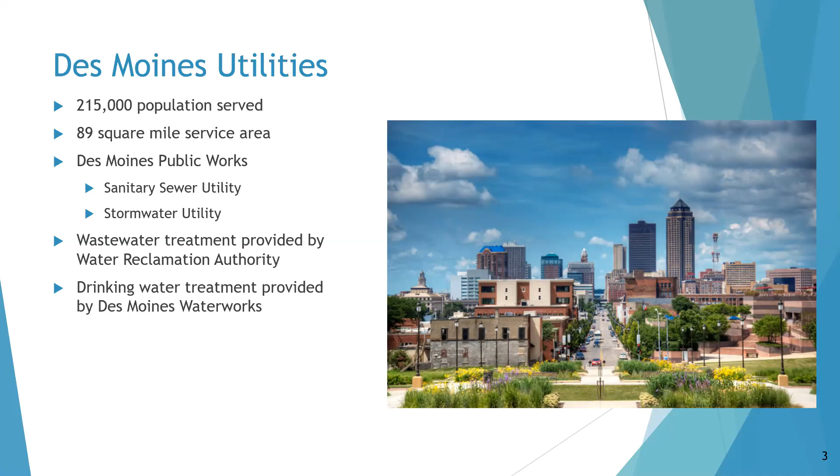A few statistics about the Des Moines stormwater utility. There's about 500 miles of storm sewer within the city. That's the underground piping and boxes and all the different underground networks that exist. 270 miles of open channel conveyance according to the GIS system that we have. I'm sure there's more out there that's just not completely quantified, and we'll want to make sure we're capturing that. Within the system, there's about 29,000 storm sewer structures. So there's a lot of those storm inlets you can see along the curbs, a lot of the junction boxes and other pieces and parts that go into that.

32 pump stations, 35 detention basins, and the city owns and operates 16 miles of levees, but they operate about 23 miles because we actually operate and maintain about 7 miles of Corps levees. And that's one of the big projects we'll talk through in just a little bit too.

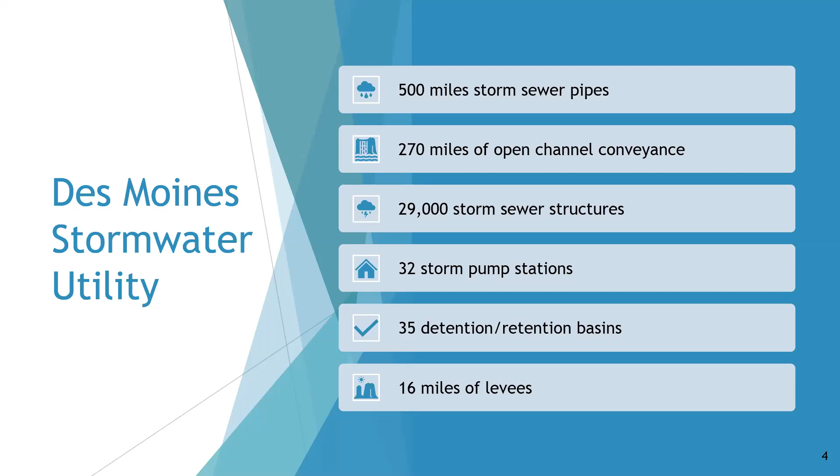So you might ask yourself, why is stormwater master planning really a big issue right now? For me, I've only been at the city about a year now, so I missed the June event, but I grew up in central Iowa, so I know the big events that come through every 5 to 10 years. Sometimes those are big river events, when the Des Moines River and the Raccoon River get filled up and flood. But what's really driving this right now was more of a localized flooding event. If you lived in northern Des Moines or Ankeny towards the north, pretty much everybody was either impacted or knew somebody that was impacted by the June 30th, 2018 event.

The picture in the lower right is actually the tracking of how much water was dumped from that event. And the bad part was it was a very short duration event, but it dumped a lot of water. As engineers, we like to be able to quantify what type of storms they are. Is this a storm that we anticipate will happen every year based off historical averages, or is this going to be every 100 years?

And the June 2018 event turned out to be, in Des Moines anyway, that 7 to 8 inches was about a 500-year storm because of the amount of water and the time that it took for it to hit the ground. As it traveled up, it got worse into Ankeny, so they got about 10 inches of rain up there, and it caused some problems there, but it caused even more problems for Des Moines as it was coming down the east side in Four Mile and flooding on the east side of Des Moines.

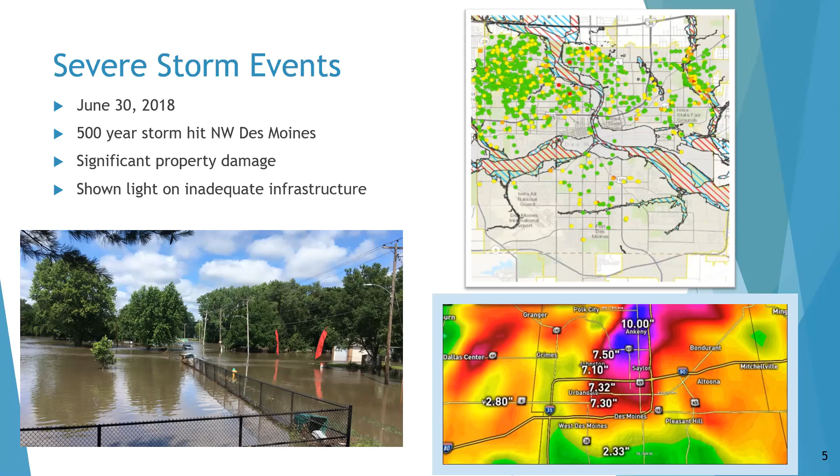Those watersheds have had a lot of dollars identified that need to be spent, but there are other issues throughout the city, and there has not been a concerted effort to try to prioritize where we should spend the dollars. For the most part, whoever's yelling the loudest gets the dollars. And that's a reality with just about everything, unless you have a defensible program in place to say, this is why we're spending where we are now.

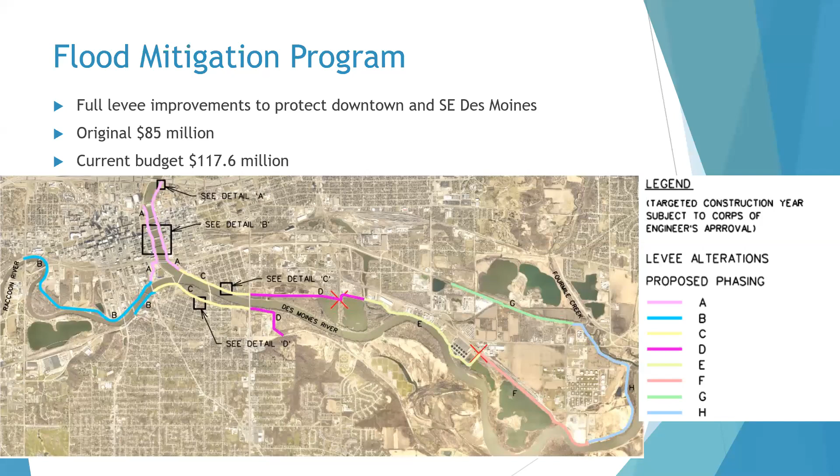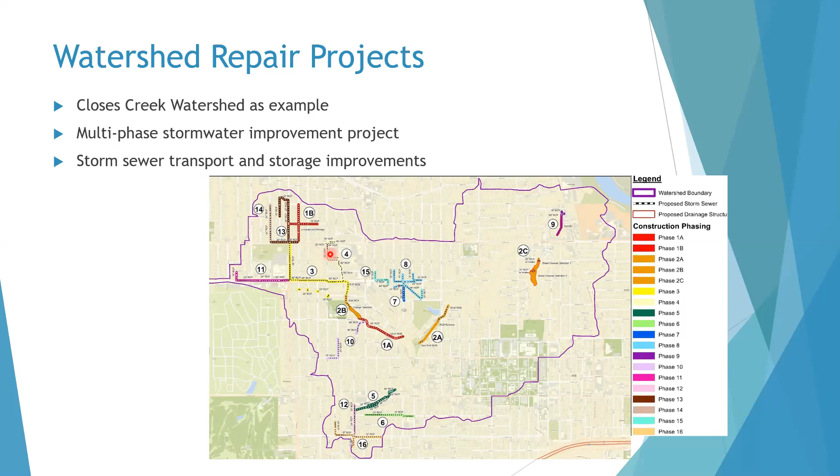So this is an example of those more watershed approaches we're looking at, and these are good, but are all of these really higher priority than other areas within the city that just haven't been yelling and screaming as loud? Maybe, maybe not, but that's why we're going to go through and try to capture as much of that as we can.

So some planning challenges we have, as you saw, there were large programs that are dominating the capital improvement program. The stormwater CIP peaks at about $40 million in 2021, but then it drops down to about $7 million. But most of those dollars are still rolled up in that large program. There's only about $1 million or $2 million a year for system-wide renewal and replacement, and that's just not enough for a system of our size.

So we have an opportunity right now, as we're working through some of those large programs that are using a lot of the capital dollars, to put a good plan in place for the stormwater system. A defensible plan, a risk-based plan, one that the council can get behind, and also a plan that's not being driven by one person. This is a plan and a process that the entire department is behind, so if that person takes another opportunity, it doesn't just die.

So I threw this one in, excuses to avoid master planning. Master planning is just an engineering activity. Well, as an engineer, I like to have a good, well thought out plan based off of data, based off of information that we know. And if we don't know, we make some reasonable assumptions based off of engineering judgment or information from the folks that have been here. There's a lot of good information from folks that have been with the city for 30, 40 years that we can bring into this process so that even if we don't have the perfect data, we're pretty confident what we're seeing is reasonable.

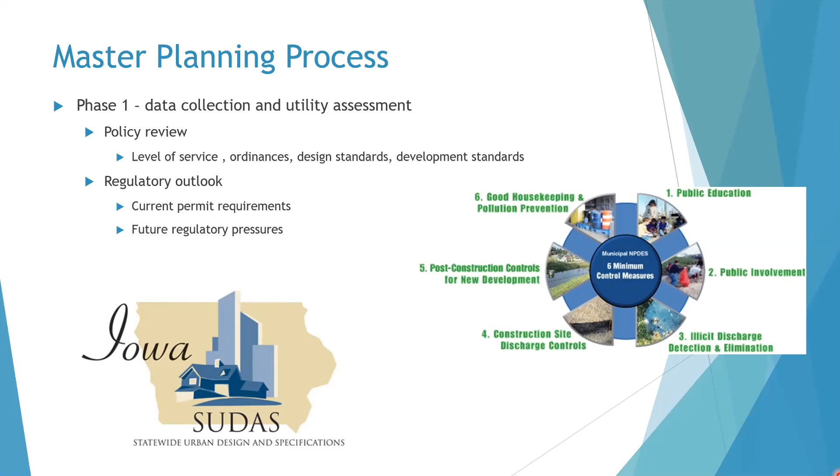But phase 1, we're looking at data collection and utility assessment. So we're looking at where we are right now. What do we have right now? What information do we have right now? What policies, ordinances, and design standards do we have in place? Also looking regulatory-wise, what current permit requirements do we have? We do have a permit that we need to meet. How well are we meeting it? We're going to be going through an audit of that. But then also looking to the future, are there future regulatory pressures that may impact what we're doing now that we'd be well advised to consider when we're putting together a program like this?

Looking at existing data. How are we collecting data on our assets, on our pipes and our structures, and the work that's being done, and the materials that are being used and the contractors that are being used, so that we can understand how much does it cost to actually operate and maintain a system of our size. Most people are still using a lot of paper work orders for that. We actually have a

program called Lucity, a computerized maintenance management system that we use to track our assets, our work, and also tied in with GIS so we can see it on mapping. But understand, what do we have and how confident are we in the data? Just because I have a database that says this is what everything is, well, that data came from somewhere, and it was usually somebody pulling something off of an as-built, so how confident are you? So there have to be some spot checks on that.

Or even at the Home and Garden Show, we were out there helping. The MPO was leading it, and there were a bunch of other folks from cities and the county supporting the rain campaign, and just getting up public awareness on what can and should be done. But we're going to take a look at all those things and see what's working, what's not, and how can we improve that.

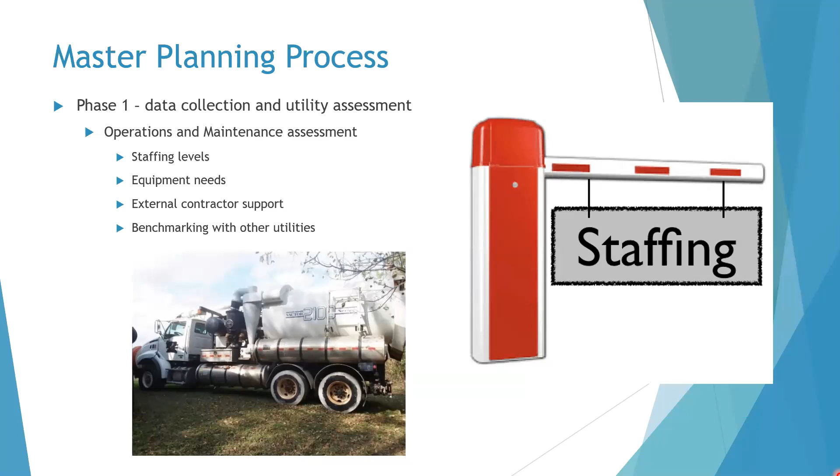They're not letting stuff break down so that everything we're doing is an emergency repair. We're trying to be as proactive as we can. So taking a look at staffing levels, equipment needs, and external contractor support is another piece of what we're going to be looking at as part of this process. So that was kind of identifying what do we have and where are we at right now.

We take that data and start doing some analysis with it, and that's going to be phase 2. So looking at system characterization, making sure if there's gaps in our data, how do we go and collect that on the gravity system? Are we missing something on the pump stations? How do we tie in the green infrastructure that's being installed? We're looking at some of the newer developments, the Market District.

We're starting to have some meetings so that, rather than every building or development having to do their own on-site detention, we move more to a regional detention process. Green infrastructure, bioswales in the green space between the street and the sidewalks, being able to manage some of it there, and looking at that as an overall system. Des Moines has not done that very much. I know some of the other cities in the region have, but Des Moines has been a little reluctant to do too much of that.

And so how do we do that? Going through and doing some high-level hydraulic and hydrologic modeling, problem identification. So this goes back to some of that public outreach, which is the next one we had there.

But some folks have had stormwater issues, but they've just been an issue for so long that they've kind of given up on raising it as an issue anymore. The basement floods; when it rains, there's a foot of water in my basement. Well, we put everything up on a shelf 2 feet in the air, and we don't really seem to have any problems with it. It fills up for a little bit, and then it goes away, and they just kind of live with it. I'm kind of flabbergasted by that, but that's what's happened in some neighborhoods.

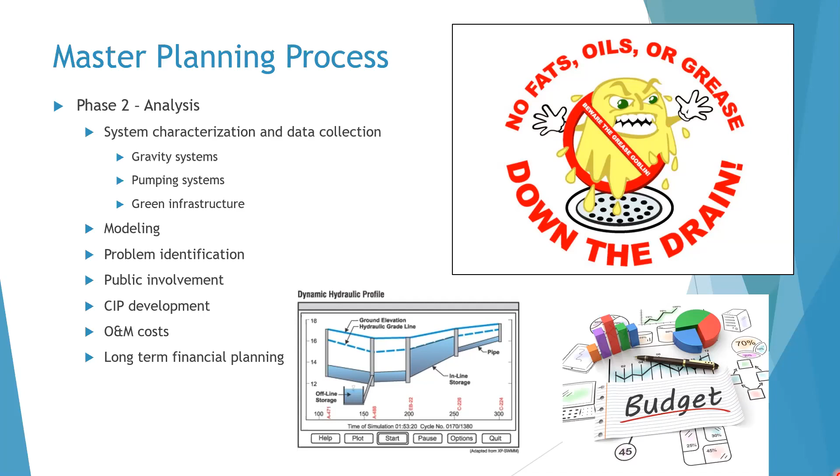And so how do we get out and really try to capture as much of that as we can, so that when we're identifying the problems we have, that they're realistic? And also so that when we're done, people don't come out of the woodworks and say, well, I didn't get to tell you what my problem was. So we need to be able to have some good public outreach there. From there, we go through CIP development, the 5-year, and then looking at O&M costs, making sure we're capturing that and putting together a long-term financial plan.

And then phase 3, this is where you're getting into that design, construction, and operations of everything that you have. Making sure you have capital projects that are solving the problems, making sure they're being done on time and on budget, making sure we're meeting our permit compliance, our stormwater permit and our sanitary NPDES permit, our system maintenance, making sure we're out there and making sure inlets are clear when it's raining, or if they do get clogged up, we're cleaning them out in a quick time manner. And then periodically updating the plan based off new information.

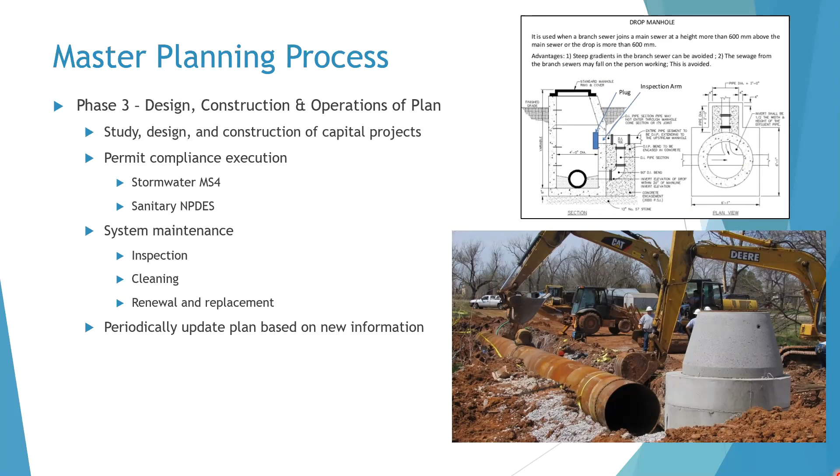If we can go through this effort and we build this perfectly, make this perfect report, if it goes and lives on a shelf somewhere, it's basically worthless in a couple of years. We need to have some way so that this continues to be updated based off of new information that comes in, new things get prioritized. We have a big rainstorm and we have issues in another part of the city. We don't want to throw the old plan out, but we want to be able to adjust it as new information becomes available.

Some benefits of master planning can also link opportunities. Des Moines, like I said, hasn't done a ton of green infrastructure, but we're dipping our toes in a bunch of places, either in neighborhoods or even outside of the neighborhoods. We're working with Polk County and some of the other organizations for bioreactors and oxbows in Fourmile, kind of restoration of some of the smaller oxbows along the streamway. Trying to standardize how do we manage those things? We do a pretty good job of designing them and putting them in, but it's difficult to make sure that they get established and make sure that they're maintained for the long term.

And we're even evaluating opportunities outside the city that can benefit the city for both flooding and water quality. Are cover crops something that are worthwhile for us to put some dollars into if there's a return to the city on those sort of things? And so we're looking at things very small scale to very large scale.

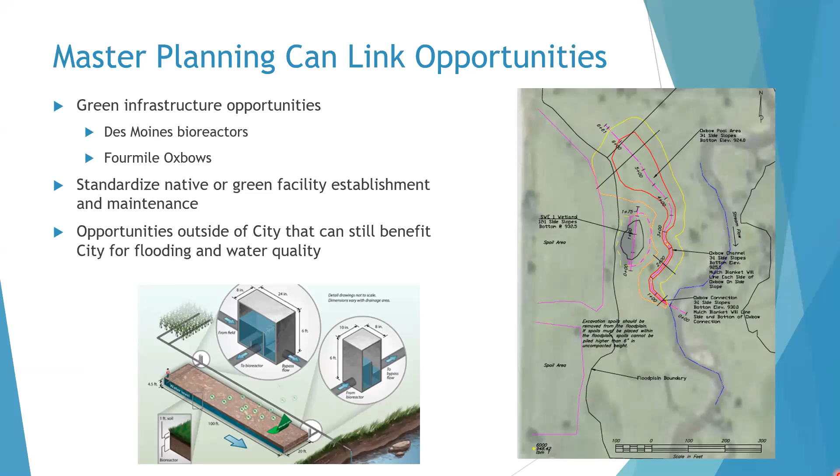So some outcomes and tools that we really want to gain from this, and I talked a little bit about this already, and I know I'm up to 25 minutes, so I apologize, I'm almost done. But we're looking at benchmarking with other utilities, having that as a way to talk through where should we be targeting, having more effective public outreach and education methods and tools. We talked about the modeling a little bit, but having at least a system-wide across the city, the hydrologic, so understanding how rain has fallen, and then the hydraulic piece of once it hits the ground, how does it travel? It travels across the yards, it travels across the streets, it ends up in the pipes and the streams and the rivers, and understanding the different rainfall events and how those actually flow.

Having tools and processes to collect information on the assets, and then also understanding what's the remaining useful life. You know, we put a pipe in 50 years ago. Do we expect that to last another 5 years or another 50 years? And so you generally need information. You can make a lot of assumptions. I can make a lot of assumptions and come in the ballpark, but it's much better to have specific information on each of those assets to be able to make those projections. You know, linking electronic systems to store, manipulate, and output the data.

So right now we have a lot of different systems. IT has systems, engineering has systems, public works has systems, finance has systems, and they don't talk together very well. And so quite often things slip through the cracks when we're trying to make sure it's getting passed from one department to another department, or even one person to another person. Sometimes things get dropped or missed when we're doing those sorts of things.

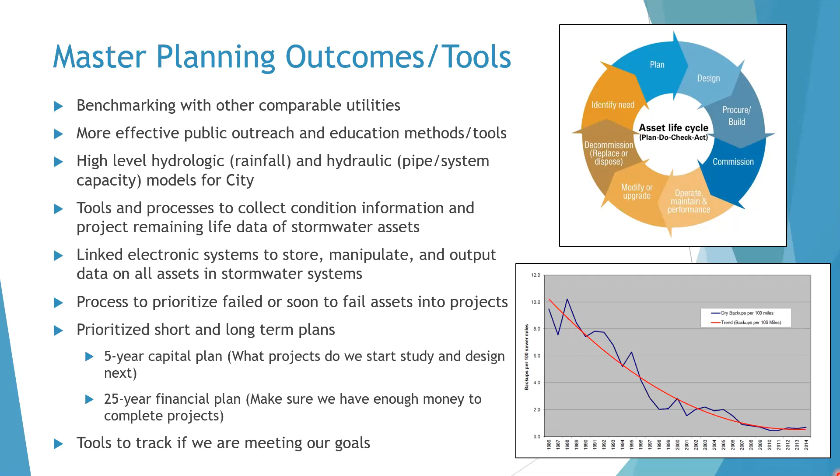So master planning benefits, we talked about this, moving a little bit from reactive to proactive, better understanding risks, manage costs, and be able to justify your needs to your elected officials. I've actually been through this with another utility, and that was one of the biggest benefits of going through something like this. Quite often when you come to an elected official and say, we need more money to do this. Well, why? And what if we don't? What could happen? What's the risk?

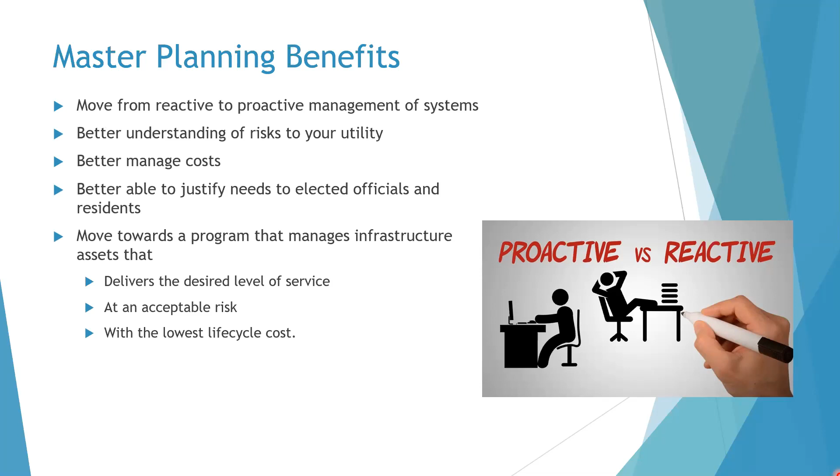So having a risk-based approach to this so that they can understand if we're not doing this, the system's continuing to get worse over the years, and really we're just pushing the problem further down the road. And then finally, moving towards a program that delivers infrastructure assets at a desired level of service at an acceptable risk and the lowest life cycle cost.

And I'll let you read my final thoughts, but I will go ahead and open it up for any questions. Are we doing questions now or at the very end? We're gonna do them now for you. Okay. And I'll help with that.

So it looks like the first handful of questions are more about the green infrastructure. So bioswales, prairie planting, open lands, and then reducing impervious surfaces. So how is this being worked into the planning process? I know we've had Jonathan Gano before with our group saying that he's always looking for opportunities. So how is this being built into the plan and then the capital improvement program? So the one thing we don't really have is what's our policy on green infrastructure? Do we have goals for that?

The hard part with a lot of what's going on right now is, I didn't really get into the sanitary side of things, but the combined sewer program is another massive program that the city's been working on for about 20 years, where we've been separating the storm and sanitaries from a single pipeline into separate pipelines. And some of the areas where people really think it would be a good idea to do the green infrastructure is like in the downtown areas.

But we spent a considerable amount of dollars down there to do either the sewer separation, or there are areas that we just can't separate. And so if we put green infrastructure in there, then that water will go through the green infrastructure and then end up in a combined sewer that ends up at a treatment facility in front of the wastewater treatment plant, and it goes through the full process anyway. So just doing green infrastructure for green infrastructure's sake doesn't make a whole lot of sense. We want to make sure that we're getting value out of those dollars.

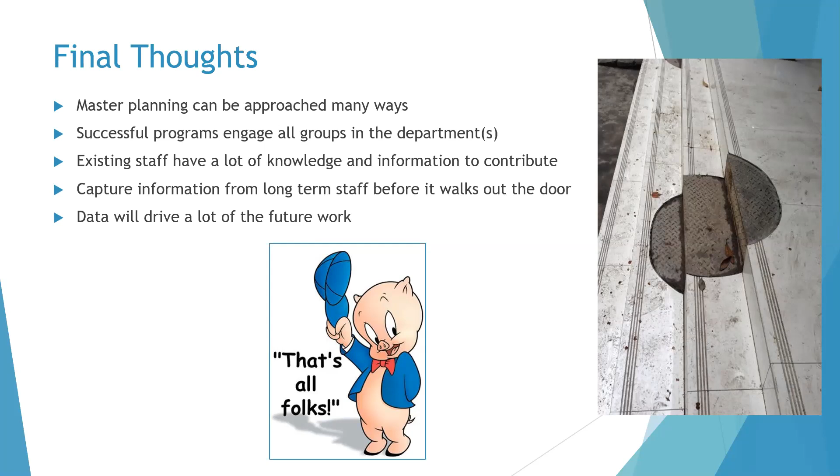So it started out, there was an open channel and everybody built around it. A developer came in and said, well, I can squeeze 3 or 4 more houses if I build a box culvert and build houses on top of it. But then that takes away the open channel where the water goes. In small events it's fine, but in big events it doesn't contain it very well, because then it turns into overland flow. And now that's when we got houses basically surrounded by moats, if not just completely inundated by those storm events.

So that one specifically, there was concern that it would have such an impact to the style of neighborhood it was, and it would have required so many houses to be bought out. For the most part, we're looking at more regional detention basins that we're putting in with very targeted buyouts versus just trying to clear out houses along what was previously the open channel. It's kind of a decision of what impact you want to have on the characteristic of your neighborhood, and how much of an impact you have on the residents that are there.

When they're being bought out, they're being bought out at market value. So maybe it's a house that floods and maybe they want to be bought out. But it's also a big burden on the city, spending a lot of money on buyouts when it might be more cost effective to just upsize the pipes, put some basins in, and leave the neighborhoods in a similar way that they were before without being so disruptive, because these projects are very, very disruptive no matter how you do them.

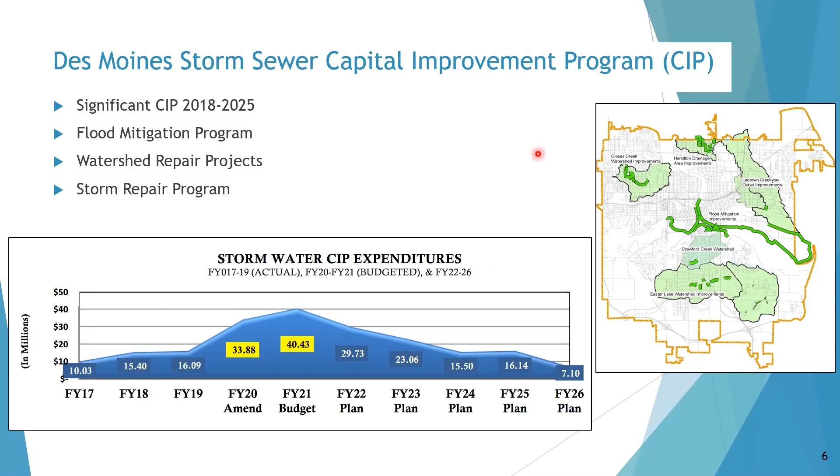Sure. Well, we appreciate you, Patrick, for coming and sharing all this information. Sheila, I think John's going to talk about bioreactors, and if not, we will come back to that. But it is my pleasure to now introduce John Swanson. He's a water resource planner and watershed management authority coordinator with Polk County. John is a Des Moines native from the east side and has coordinated watershed efforts in Central Iowa since 2012, including projects along Big Creek, Easter Lake, 4 Mile Creek, and Walnut Creek.

John didn't add this into his bio, but John was recently honored with the Circle of Excellence Award from the Iowa Agriculture Water Alliance as part of the 3rd annual IAWA Iowa Watershed Awards, and he is honored alongside 5 other watershed coordinators who are also receiving the same award for their multitude of contributions and steadfast dedication to improving water quality across the state.

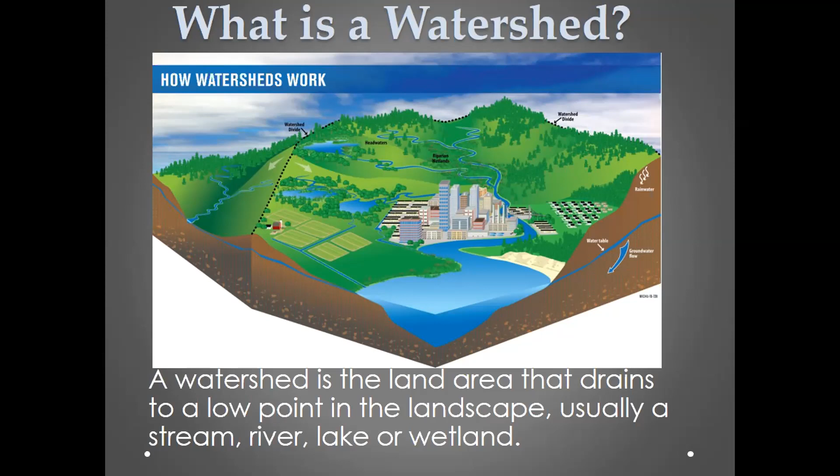And usually you're going to have to change something, change how you're managing that water. That's something we've really been working on for years now locally, and I think we're really starting to make some progress in several different areas. And really the idea is that land use is directly connected to the health of the water. Iowa's native prairies manage water a lot differently than our agricultural areas, as agriculture manages water a lot differently than our urban, residential, and commercial areas.

And as I go through some of these things, I'd like you to think about those different landscapes and how Iowa, being one of the most changed, most land-altered states in the U.S., has really compounded some of our issues, and how we are going to address these landscape changes as we try and improve our water.

And really the results, I throw this up, and I've looked at this for years, it's always astounded me. We have a lot of issues in Iowa. All of these lines on this map are EPA impaired waters. It really shows the daunting task, but it also shows how important the task is, specifically about water quality. There's a lot of work to be done, but even just looking here in Polk County, we have a lot of our own work to do locally.

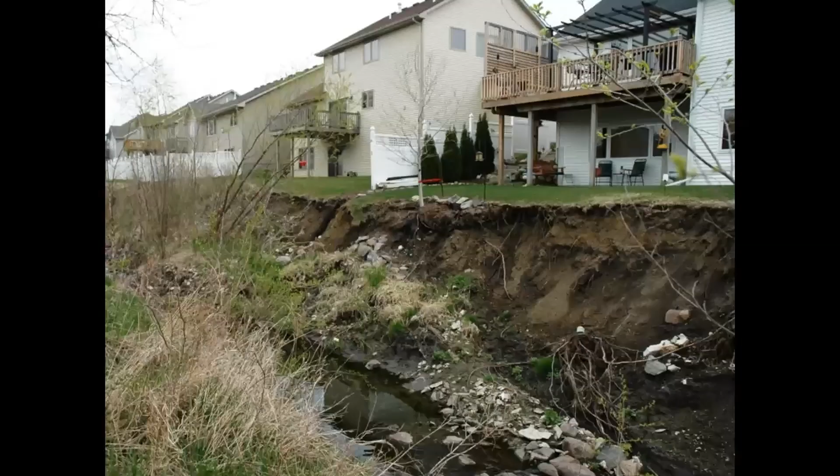But when I talk locally, I can tell you water oftentimes means something different to the Des Moines Metro. When I work with city councils, or when I talk with residents about our watershed issues, these are a lot of the things that are being brought up. It's not always water quality. In fact, a lot of times it's, hey, my yard's underwater, or there's erosion, my street goes underwater every time it gets a 2-inch rain. Or it's issues like this that are really hard to deal with.

This one sticks out to me. You can see there in the middle, those people tried to strap their tree to a T-post to save it. They were really worried about their tree, but I was out there and I was like, there's some bigger issues going on. They told me how when they bought their houses, this was a little brook, a foot wide and a foot deep. And not many years later, that stream became 30, 40 foot wide and 10 foot deep.

And really what had changed was their watershed. In this small example, their watershed had some urban development upstream, compounded with the more and more rain that we seem to be getting yearly. They had some stream degradation, and we're left with a really big concern.

And I can tell you from a lot of people that I've met with over the years, water can mean a lot of different things to a lot of people. For some people, it's a really big concern, while others don't really think about their water or where it goes. And we have to find ways to connect with all those people to think about these things and make changes.

So as Allison asked me to put together a little presentation, and I do quite a few presentations, I really tried to think about a few key actions that may be of interest to your group that I could share with you today. So with this presentation, I'm going to go through 5 key actions that are going on in Polk County, the Des Moines Metro, to try and improve our water.

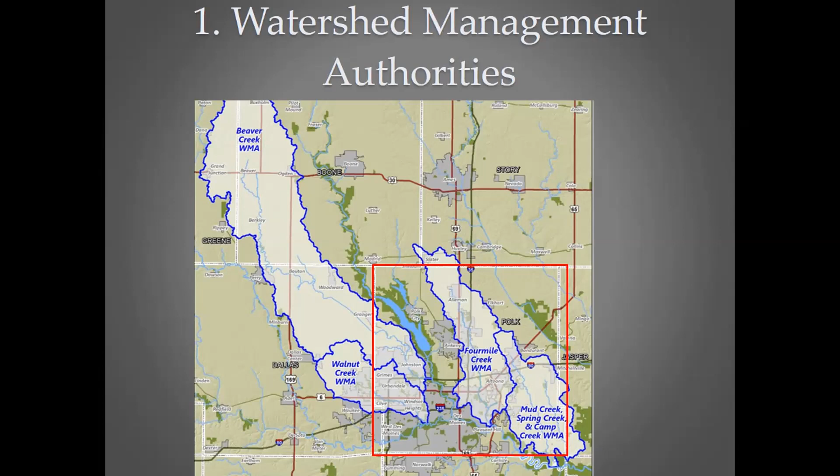And what these watersheds have really done is built trust amongst stakeholders. I can tell you, all of our watersheds have ag and urban areas. There's a lot of lines of distrust between different stakeholders, different issues between stakeholders. And the biggest strength of these watershed groups has really been, how do we get everyone to sit together and best understand what each other's issues are and what are our commonalities and how are we going to fix these problems?

And really one of the first tasks that each of these WMAs has undertaken is putting together a watershed plan. Patrick just spent a lot of time talking about the city's stormwater master plan. These efforts are very similar. This slide was actually taken out of a Walnut Creek plan. It brings the people together, understanding the issues, using science to better understand the watershed. People like myself walking every mile of stream, driving every road in the watershed, cataloging information, and then taking all of that information from the people, the science, the landscape, and putting together a set of recommendations.

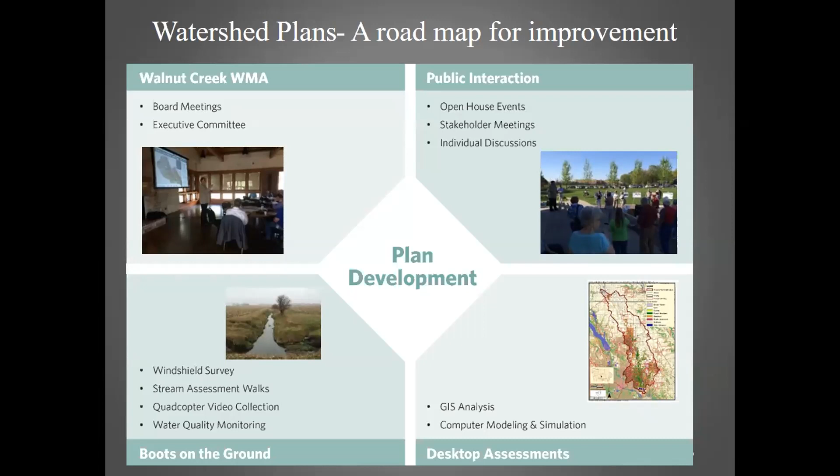And if done well, a watershed plan can really provide a roadmap to improvement. And I love opening up a good plan that really puts tools in the hands of the people that can go out and do this work. On the contrary, like Patrick alluded to, if you don't have a good plan, people think, well, a plan is just more time spent on engineering and it's just going to sit on a shelf. We've got to really make sure that these plans are used and really dictate your efforts moving forward. And if well done, they can be a great asset.

And at the end of the day, I always like to point out that our local WMAs, watershed management authorities, have no funding dedicated to them from the state or federal government. And when I was given my job as a watershed management authority coordinator a few years ago, they were like, John, here's your job. We want to build stuff. We want to improve water quality, reduce flooding. Good luck finding some funding to do so. And I was like, yeah, that's great. Let's go find some funding. And luckily, we had some good plans.

And those good plans, you have to take them and go out and find good projects and create a demand on the ground. You have to find people that want to do projects. This is actually a little bit outdated slide, but since 2016, we've utilized over 28 different funding sources and raised well over $10 million in funds. Again, bringing the people together, finding those good projects that make a difference in the watershed, and aligning the needs with the demand, and the funding has followed, which is a great model that shows partnership can go a long way.

Action number 2 that, again, Patrick alluded to is one we call the RAIN campaign. It's an educational campaign that was funded through a DNR grant. We wrote the grants and said we really want to work with our local cities and find ways to empower homeowners to manage their runoff. And this picture really speaks to it. Like I said in my bio, I worked on the Easter Lake project for a few years and spent a lot of time down there working with residents to manage their water.

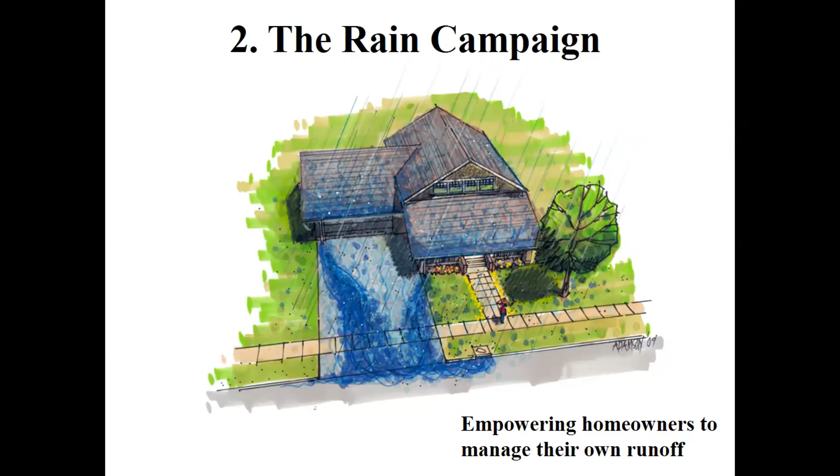And one practice that's really been the highlight of this first year of the campaign has been soil quality restoration. Again, personally, I wasn't a big believer in this for a few years. Had a few incidents that impacted me as a coordinator. One of them was we had a classic residential lot in Ankeny. Every time it rained, they had 2 inches of water ponding in their backyard because in their drainage swale, someone installed a fence. It's built up a little bit, and that water simply could not infiltrate into the soil.

And what we saw was a 3 to 5% increase in organic matter from a one-time application of aeration and compost. And I know that 3 to 5% may not mean much to a lot of people, but in working with ag landowners, when we're talking about doing cover crops and no-till, oftentimes it can take up to 10 years to get you 1% of increase in organic matter. So it was really astounding to me to see those vast improvements to soil health that you can sell to people that may not care too much about water quality, but a lot of people want a green lawn like in this picture.

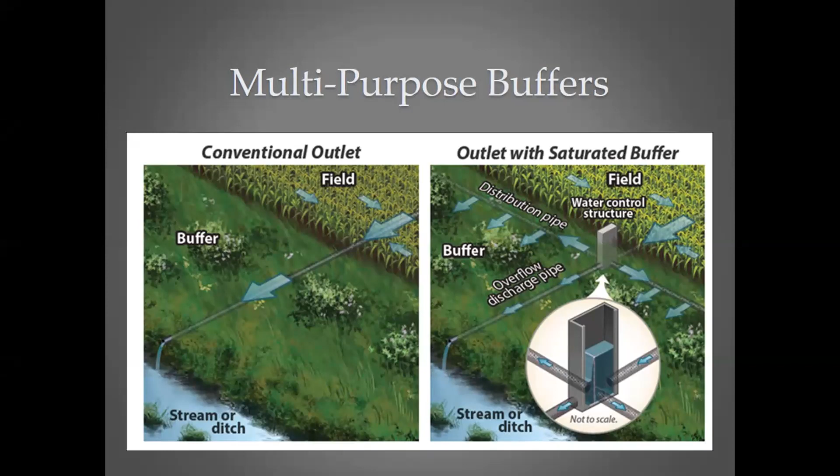And as we sit right now, we have over 120 sites surveyed in Fourmile and Walnut Creeks. And our goal is now to install, we're hoping to install 100 of these in fall of 2020. To put that in perspective, there were 50 installed in the whole state in 2018. So we think we have a process here that could work really well. Obviously, we have a few steps left, but we're seeing really promising response from landowners and sites.

And again, the great thing about these is they're completely underground. If installed effectively, the landowner does not lose any production land. It's utilizing those existing buffer sites, and really adding a layer of benefits to not only get the habitat on top and the management of surface water, but now we're going to treat that subsurface water.

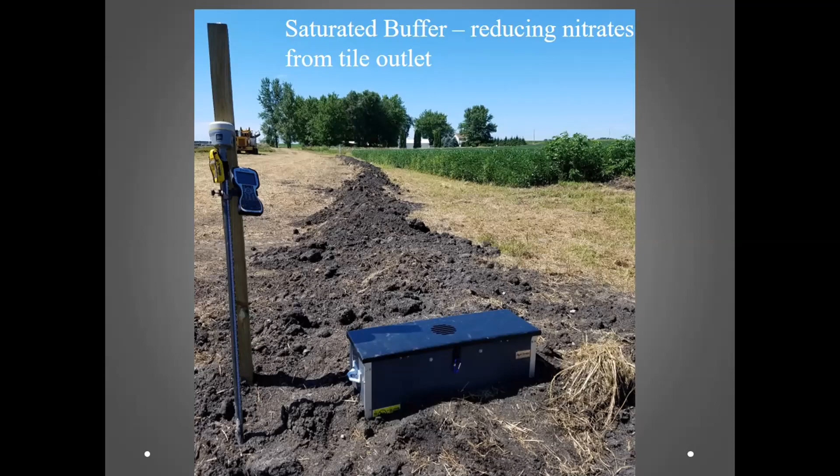And there was a question about bioreactors. Now, just like green infrastructure, there's a whole toolbox of tools that can be done. The same is said for the agricultural lands. So the saturated buffers require lots of lateral space and generally need at least 500 feet to run those distribution lines. When you don't have that space, we're looking at bioreactors actually as a secondary practice to install.

We're actually excited. We had a partnership with Des Moines, with NRCS, found and designed several sites where Des Moines actually partnered with local landowners and installed them within the city limits, but on ag lands. It was really a great show of partnership. So now that we had a couple of these in Polk County, we're hoping to move that forward too.

Now, I did say that this is a secondary practice. A couple of the reasons we're prioritizing saturated buffers is these generally are $10,000 to $15,000 versus the $3,000 to $4,000 per tile outlet to treat. And the second part is they haven't been around too long, but there is a point in which there's not enough carbon in the wood chips; it decays and breaks down.

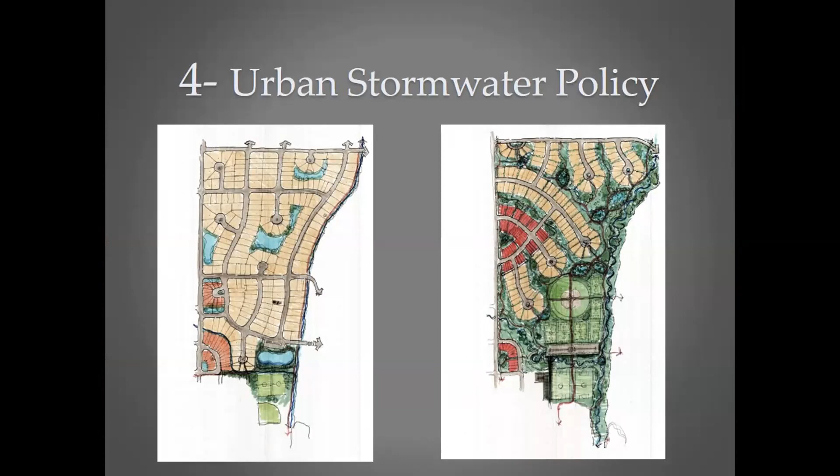Number 4 is looking at the actual urban stormwater policy. Now, when I say policy, I'm talking about thinking about new. Currently, when we think about the Des Moines Metro, we think about our small streams. This is a lot of what we see. We see a lot of erosion happening. A lot of our streams have been classified as severe erosion, in some cases very severe. And a lot of that, we know that when

we worked in a close partnership with MPO, Capital Crossroads, and the metro cities over the last 2 years to look at how we are managing our stormwater with new developments and how we could improve it. And through that 2-year process, I think we had more meetings than any of us ever thought we would have discussing how to manage the stormwater. But there were a lot of key points agreed upon,

and in its simplest form, these new recommendations follow something called the unified sizing criteria, which is essentially if you get 1 inch of rain or 7 inches of rain, you need to control the release of that water to have it mimic the pre-development, pre-settlement runoff rates. So if you were to get a 1-year storm event or a water quality event, the 1.25 inch rain, you want that water to infiltrate into the ground or leave at a rate that would mimic a prairie area. The same would be spoken if you had a 10-year event or a 100-year storm event, a very large event. You want that water to leave the sites.

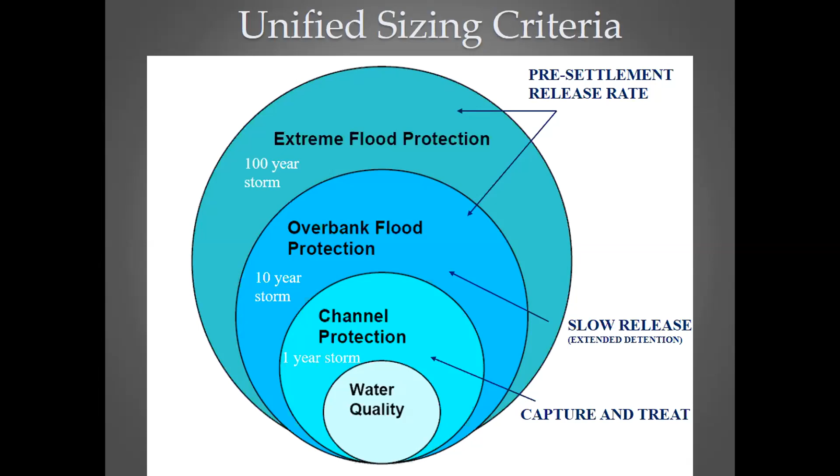And while we have these new design standards, we're really looking at how do we bring stormwater management into making it an asset rather than just something that has to be dealt with or thrown in the corner of the development. How do we flip that script and talk about it earlier in the process and really think about how do parks and stormwater management and green space all interact to improve our communities and really address some of those erosive and flooding issues we're having.

Fifth and final one is water monitoring. There were a couple things that were happening, and as some of these efforts were going underway, and there's a lot going on across Polk County, there were a lot of folks saying, what's being done to monitor the water?

And one of the first things, Rich Leopold, director of Polk County Conservation Board, when IOWATER kind of closed as a program, and him being one of the people that really started that program years ago when he was with DNR, said, hey, we have a lot of staff that all could be trained to monitor our water bodies. If nothing else, it could create really a red flag system, or at its best could create some long-term data trends that could be used. So a couple years ago, he said, we want every staff member for Polk County Conservation Board to go out bi-weekly. And they had about 50 sites that they incorporated in that first year.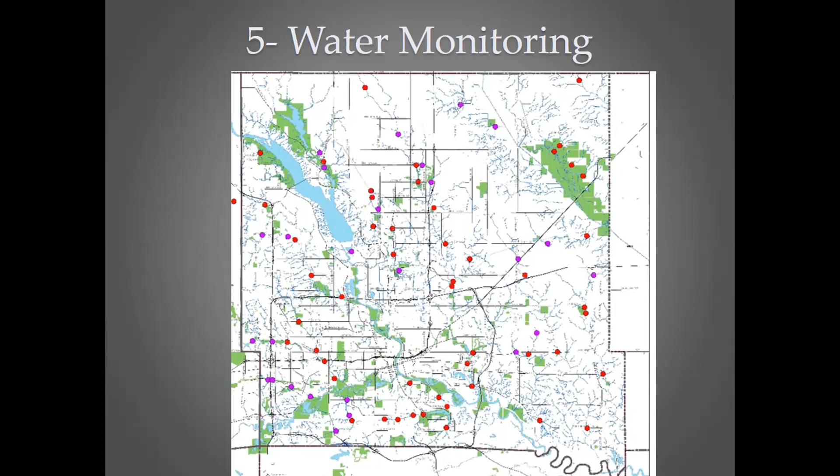Secondly, we really wanted to look more within our watershed management authorities. Two of the ones that I work a lot with are Walnut Creek and 4 Mile Creek. We had a couple questions with how are things happening locally. One of them being, how are different landscapes impacting our watersheds? Whether it's from the upstream agriculture areas, the more suburban, newer development portions, or even the older residential areas that oftentimes impact the lower portions of our watersheds.

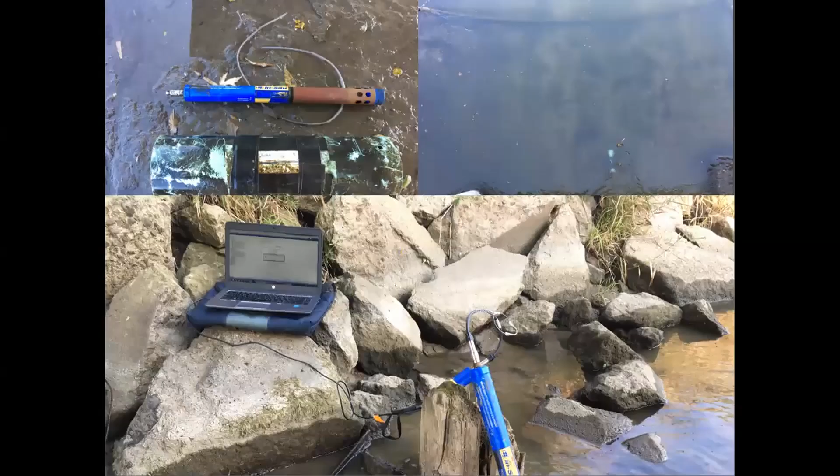So about a year ago, we partnered with Drake University to incorporate a whole suite of water monitoring systems. We installed 6 different stations, both 3 in Walnut Creek and 3 in 4 Mile Creek. There you can see the suite of what's being monitored, either by real-time sampling or by bi-weekly grab samples. We really wanted to seek out answering how are our different landscapes impacting our watersheds here in central Iowa.

We wanted to look at what different types of watershed characteristics or practices that are installed are making the best impacts on our watersheds, and what is the overall stream health in comparison to other streams across the U.S. and even around the world. And Drake University presented to our WMAs a 3-year study where they could seek out to answer those questions. And in a partnership with Des Moines Waterworks and about a dozen different communities, we're able to fully fund that 3-year study. And that's going to go through summer, early fall of 2022.

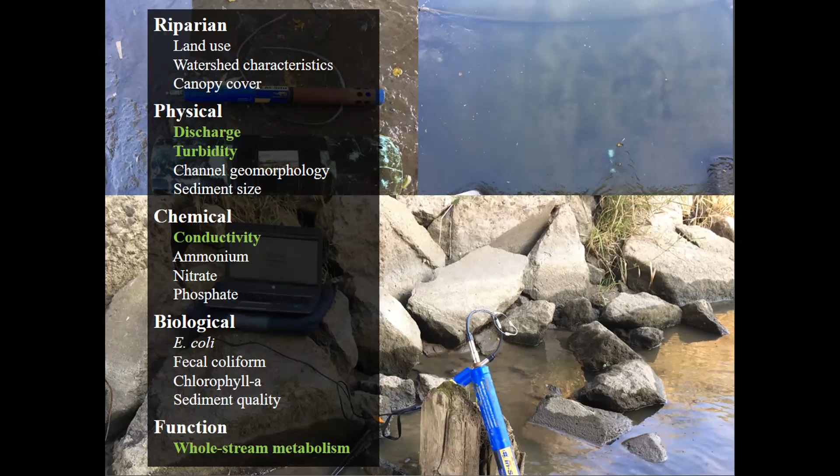So that's a lot of information, but I welcome any questions from you.

Sure. So it looks like we have one from Sheila, and she's just asking, has there been any research into the impact of poor quality clay-based backfill soil that developers have used over the last decade?

Yes, let me try and stop sharing.

There we go. So there's been a lot of research nationally about soil health, and we know that in central Iowa, there's a lot of soil disturbance happening during the new development process. And while a lot of cities have really been able to successfully stop the off-site removal of topsoil, so it's not being taken off and sold in communities, what's happening a lot is during the process of that soil being moved and stockpiled and eventually mixed with subsoils, and then a lot of compaction during the home construction process, those things are all leaving rather poor soils on a lot of our newer development areas.

And while there was the statewide topsoil rule that was passed a couple years ago that didn't last very long, in our recommendations for new development stormwater standards, it doesn't say specifically that you are required to have so many inches of topsoil, but in the Iowa Stormwater Management Manual that's referenced quite a bit in the recommendations, having good topsoil is a very cost-effective way to manage your small storm events.